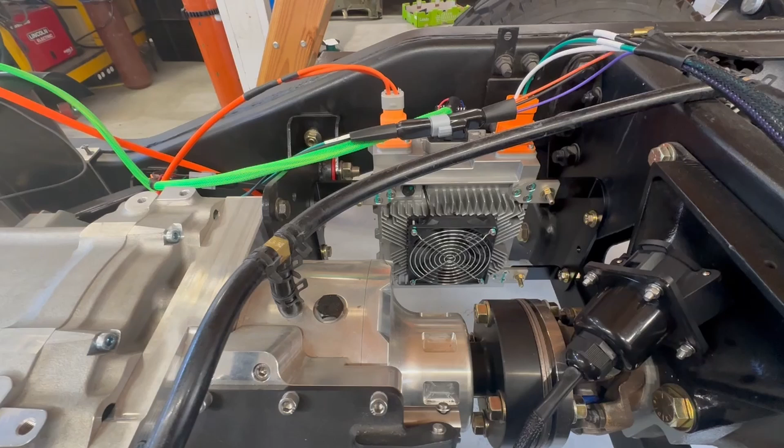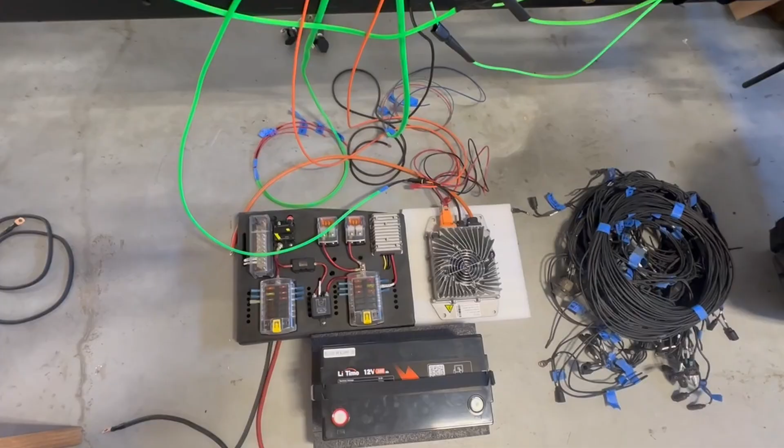Last time we left off with the installation of the onboard charger and DC to DC converter, and I said this episode would show functional testing of the EV systems. But as somewhat expected, I'm having some issues I need to figure out, and while sorting that out, I'm simultaneously handling installation of the actuators, both front and rear, which I was going to do next anyway. I'll cover the EV system issues next episode, and cover the actuators now. The actuators are for the park lock at the rear gearbox and the drive disconnect at the front motor and gearbox, both discussed in previous episodes.

I'll start with the simpler of the two: the rear park lock actuator. At the rear gearbox you can see the park lock, which pushes in to lock when in park and pushes out to unlock in drive or reverse, preventing the gearbox and wheels from turning in park. We'll place an actuator between this lever on the gearbox and the chassis crossmember directly behind it. The switching for this was covered in episode 9.

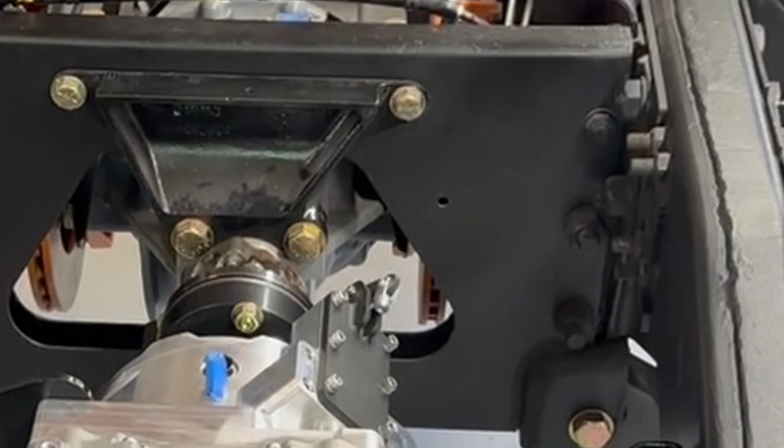Conveniently, we have a bolt that connects the diff mount to this crossmember, which is in just the right place for us to connect our actuator mount. The actuator itself is from Progressive Automations. It can handle 39 pounds of force, more than enough for what we need. Several travel options exist, and we'll use the one with 1 inch of travel, though we actually only need 3/4 inch.

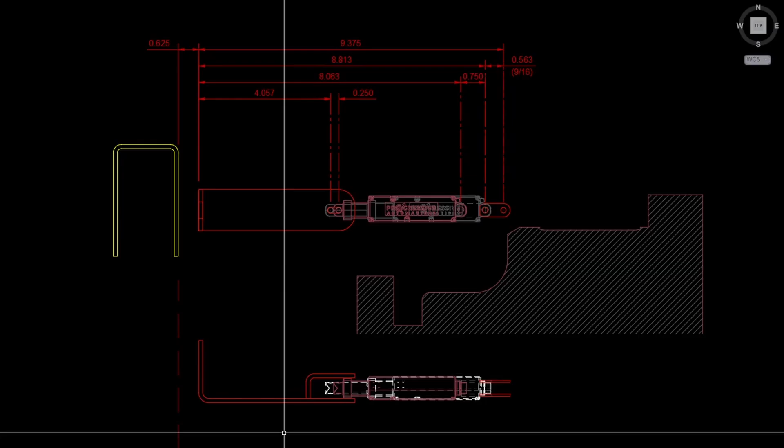To account for this extra 1/4 inch, our mount will have a 1/4 inch slot for that extra travel. Here's a look at the mount design: a simple bent plate bolts to the crossmember at the diff connection bolt, with a second smaller bent plate welded to it forming a fork for the actuator to connect to. Both plates will have a slotted hole for the actuator connection at this end.

At the other end of the actuator, we'll have two small plates that make the connection from the actuator to the park lock lever.

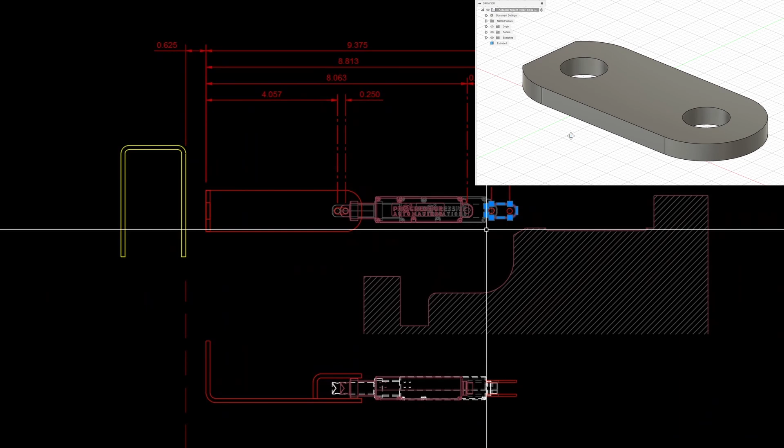With the parts ordered and delivered, we can now weld the two bent plates that form the fork together.

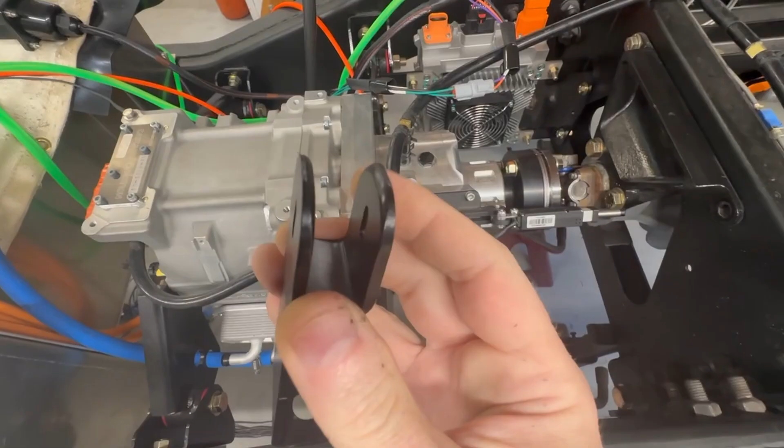Now with the part painted, we can go ahead and install it. Note that prior to painting, I eased the edges of the fork to prevent the wider portion of the actuator body from getting hung up on the edges.

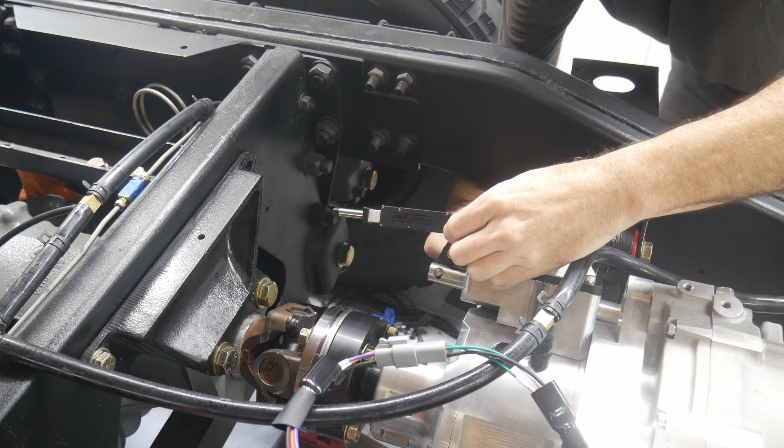Here we already have the small plates installed on the actuator, and now we're placing the final bolt onto the park lock lever.

Going in next is the main portion of the mount, bolted to the crossmember at the diff mount bolt.

We'll keep this loose for now until we make the connection at the actuator, to ensure we have the orientation right. Now here's the bolt for the connection at the actuator, and I'm placing small washers in here to center the actuator rod in the fork. The fork needed to be kept wider than the actuator rod because it needs to accept a portion of the actuator body which is wider.

And now we can tighten the mounting bolt.

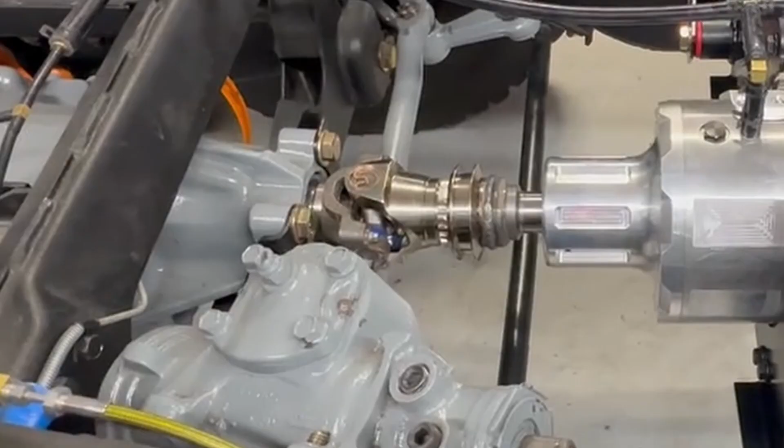With the rear installed, we can now handle the front drive disconnect. This one is a bit more complex and more difficult to install from below the vehicle. At the front gearbox you can see the drive disconnect, installed in episode 11. This disconnect keeps the front motor disconnected from the front wheels in two-wheel drive, and connects the motor to the wheels in four-wheel drive.

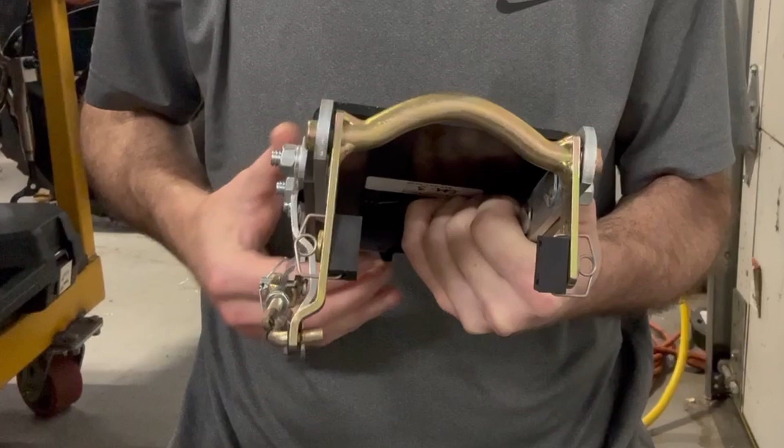This disconnect is pushed back and forth via a fork that sits within a channel in the disconnect. Normally this fork shifts via a carriage that swings the arm rotationally via an extension on the fork, and is usually controlled via a manual cable. However, I want this operated automatically via an actuator switched via my four-wheel drive button, and in conjunction with this, I'll have this fork slide orthogonally instead of rotationally from the fork extension.

As with the rear park lock actuator, I'm using the same actuator from Progressive Automations, except this drive disconnect only requires 1/2 inch of travel. As with the rear, this actuator can handle a force of 39 pounds, which is way more than enough for what we need.

Similar to the rear, we will be using the chassis crossmember at the front for the actuator to push off of. The disconnect fork itself will be connected to a bent plate that will slide within a carriage that is suspended from the secondary battery box platform.

You'll recall that we drilled holes in the platform ribs when we constructed this platform for the attachment of this carriage, which you can see in episode 13. The carriage will be a U-shaped part that is bolted to the 4 holes in the ribs.

This needs to be handled as 2 L-shaped parts which will be welded together since the bending cannot be formed on this U-shape. This carriage will drop down to a height that is just below our actuator mounting point at the crossmember, but higher than the disconnect fork.

We'll give the carriage slotted holes at the mounting points to give us some tolerance for mounting in the front-back direction, and also some tolerance for the actual locations of the holes in the ribs.

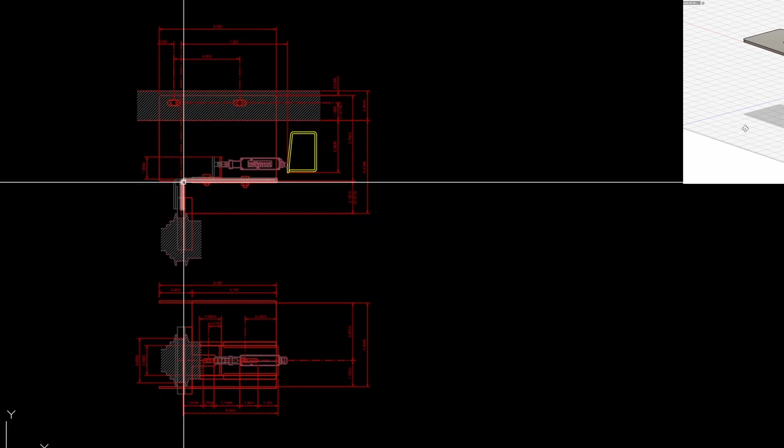The fork slide will actually be made up of 3 components. First is the basic bent plate slide here, and then we will also have another separate plate that will be welded to the top of the fork.

This will allow us to keep the fork and slide separate and have them bolt together. This is necessary in order to make the installation, which we will cover more in a minute.

Lastly, there is this angle, which is what the actuator will push against. This is connected to the main slide via a bolt through a slotted opening, which allows us tolerance to create the correct distance between the crossmember and this angle.

You'll also note this slotted opening in the carriage, which allows this sliding connection to be made without getting hung up on the fixed carriage.

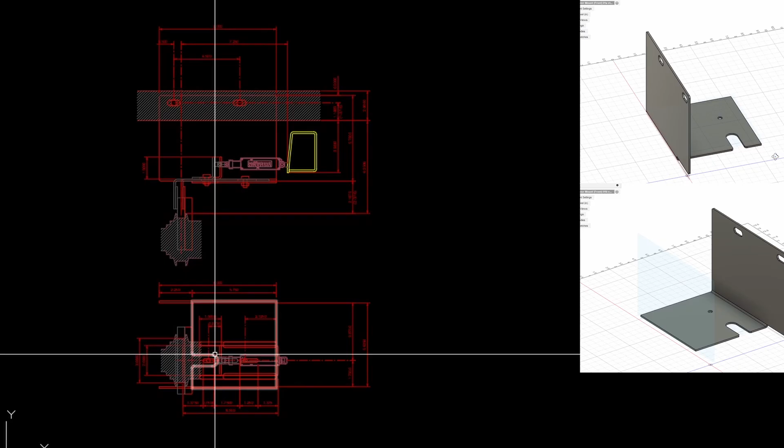I originally thought that I would have the slide connect down to the carriage via a bolt through a slotted connection, but decided instead to provide these rails and closure pieces, which I think provides for a smoother slide.

So with the parts ordered and delivered, we can now weld up the parts, starting with the 2 L-shaped carriage parts for the U.

And next we will weld in the slide rails.

Followed by the slide rail covers that keep the slide from lifting.

With the slide rails in and the slide operating smoothly, we will now weld the attachment plate to the fork.

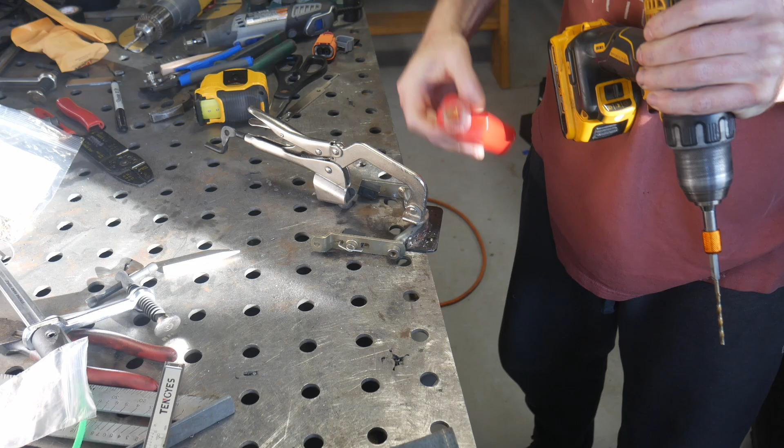Here now is the drilling and tapping of the holes at the fork plate and slide to make this connection. The fork plate gets untapped through bolt holes, and the slide gets tapped holes.

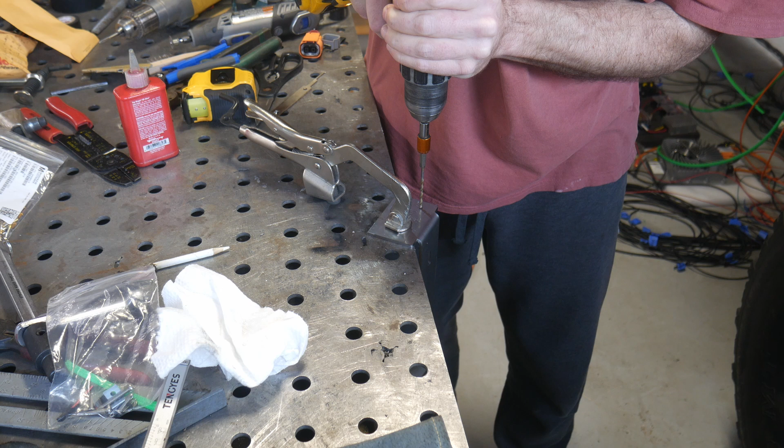The through holes were first drilled on the fork plate, and then these holes were transferred onto the slide with these components temporarily installed in the vehicle to get the alignment right.

You can see that the bottom leg on the slide was left long, and now with the two parts attached to each other, we can mark and remove the excess portion of the leg on the slide so that it does not conflict with the drive disconnect.

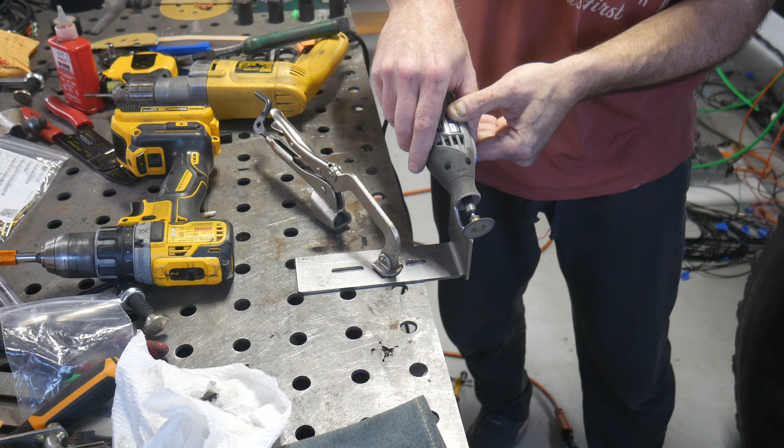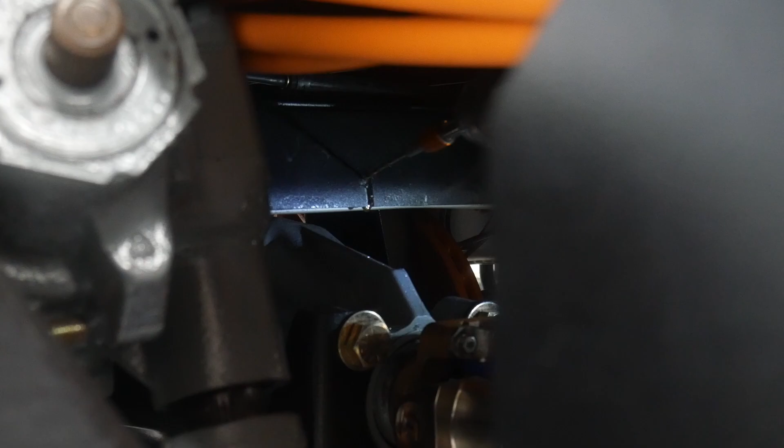Here under the vehicle now, I'm drilling and tapping the hole for the actuator bracket connection.

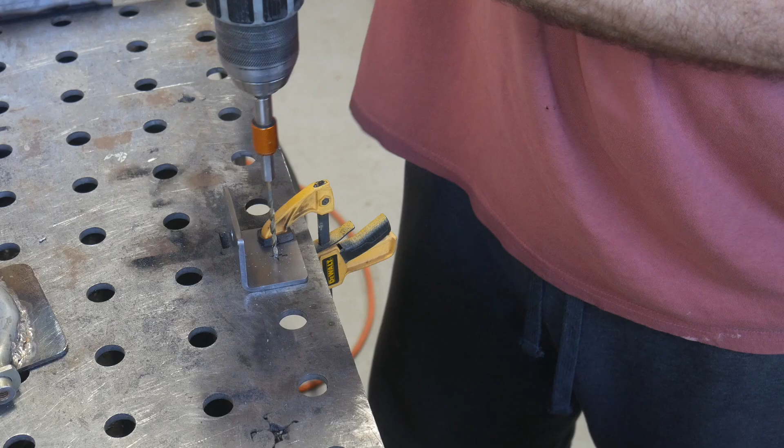And now for the related bracket at the other end of the actuator on the slide angle.

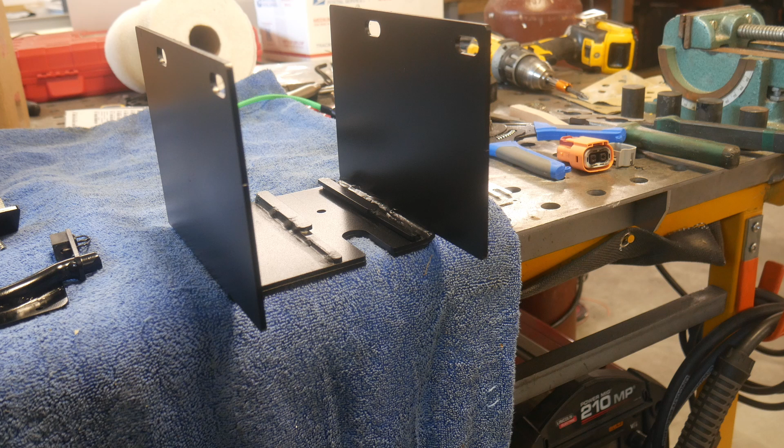Okay, so with the parts painted, I'll show you how the remaining parts go together, since this will be difficult to see under the vehicle once installed.

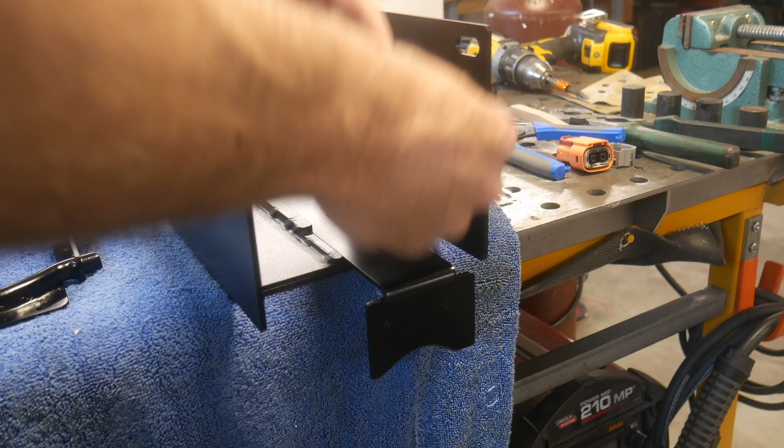First, here is the slide inserted into the carriage, followed by the slide angle that the actuator will push and pull against, and now the fork with the attachment plate that will attach to the slide.

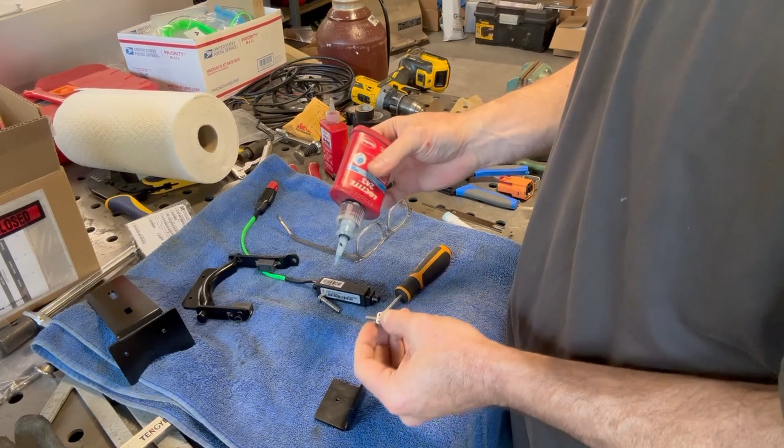Before installing in the vehicle, we will connect a few parts on the bench where it is easier to do, rather than under the vehicle.

Here's the actuator mount bracket going onto the slide angle. This bracket was not used with our rear actuator since we mounted differently for that, but these brackets did come with the actuators.

Next, the actuator can be connected to this bracket.

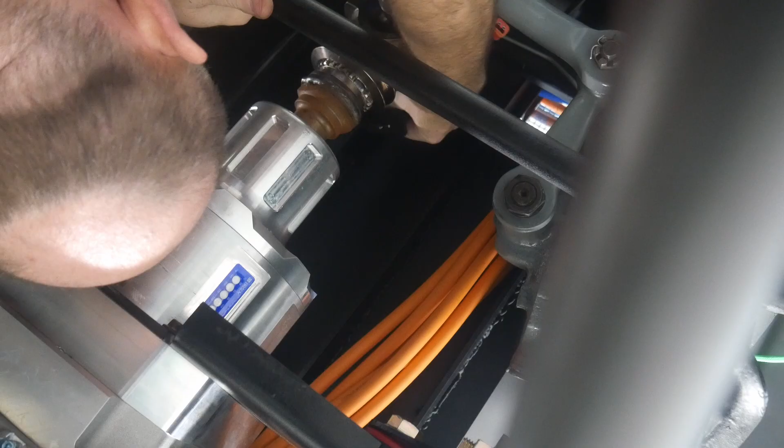Under the vehicle now, and much of this will be tough to see, but I am now installing that same actuator and slide angle assembly to the actuator mount bracket that is installed at the chassis crossmember.

Note that I have the actuator in the collapsed position, which is the position when the drive disconnect is in the forward or connected position, which is the position that the drive disconnect is currently in.

Next, we will get the support carriage into place, and this will not yet be bolted down tightly.

Next, the slide can be inserted.

Now the fork can be placed into the disconnect channel and then bolted to the slide.

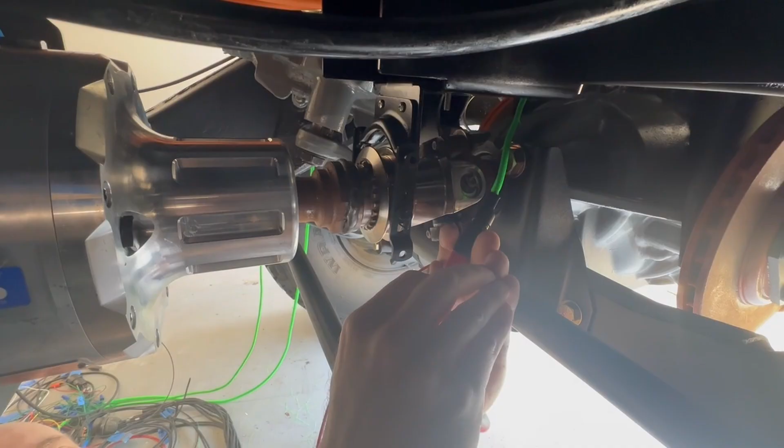And now here's the functioning of this actuator and disconnect, which will ultimately be controlled by the four-wheel drive switch and its associated double pole, double throw relay.